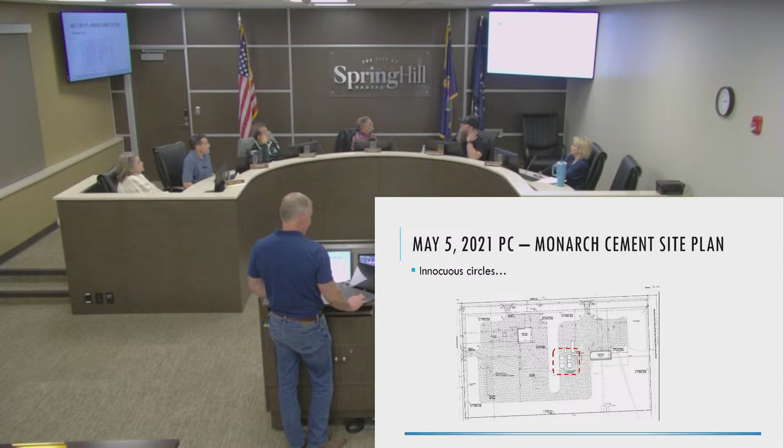So 2 years ago tomorrow night, the Planning Commission got this site plan for Monarch Cement, and you just see 4 innocent little circles there. How could you have possibly known? And then these are the elevations they provided, showing the buildings on site. But when you see it today, you have to think, well, who cares about those buildings? It's the elevation of those silos that really is the most impactful thing in that entire development.

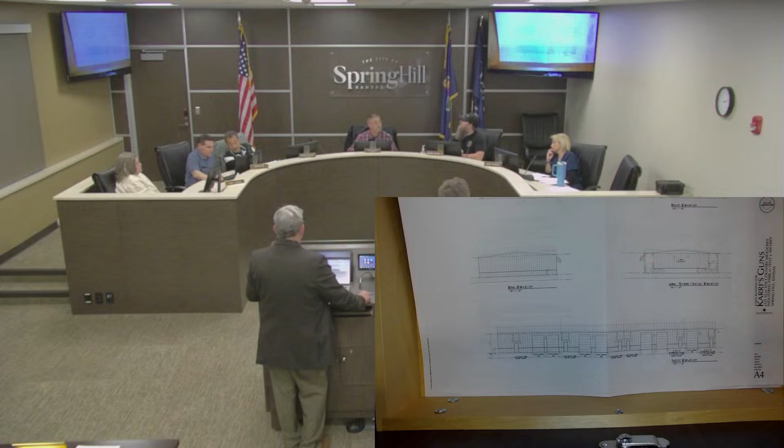Yeah, so the retaining wall is about midway of the building is when you would start seeing the wainscoting. Because from west to east, it starts about a foot and a half, 2 foot, and then climbs to the east to about 42, yeah about a 42, a 72 elevation there at the corner.

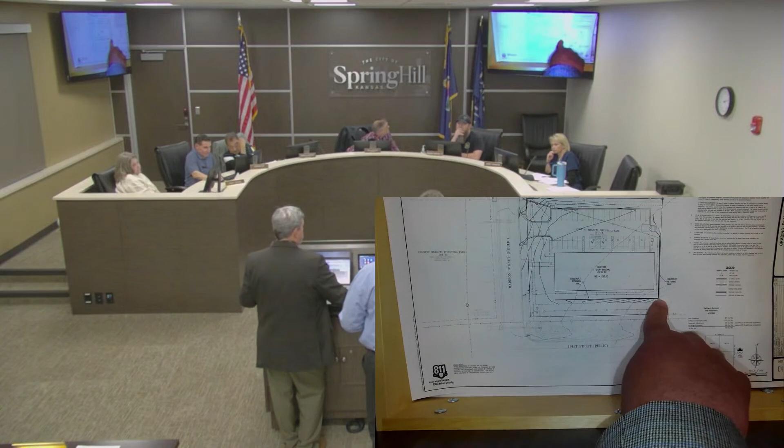So it's about 7 to 8 feet tall at that point. So you would end up with 0 to 7 foot. So midway in the building, you would start not seeing the 4 foot of wainscot. So essentially we're talking about half the building you'd be able to see it, and half the building you wouldn't be able to see it.

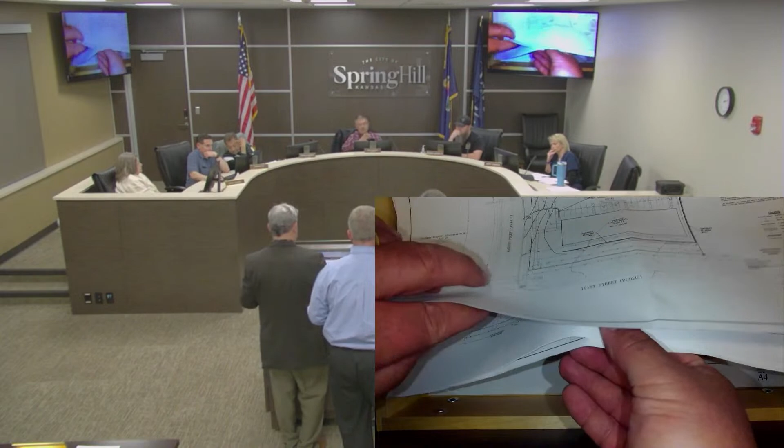Unless you're walking. That's correct. It's the landscape plan, I got showed that row of shrubs. Well, they got a lot of landscaping, but by the retaining wall it's immature for a while, that retaining wall, yeah, it takes a couple years.

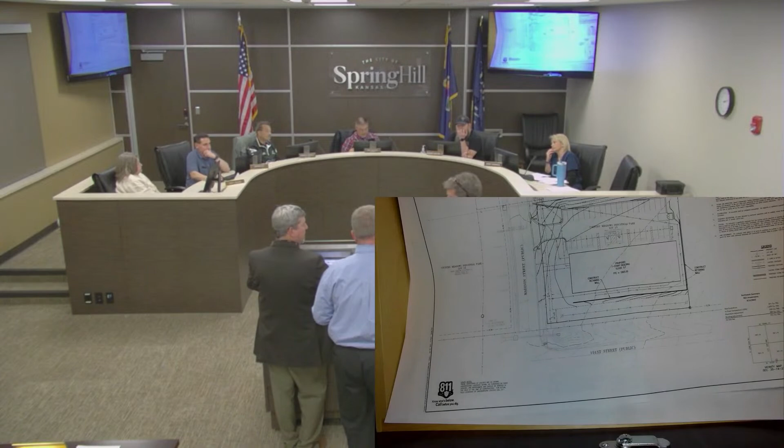Building side, so the high side of the wall is the road side. Right, yeah, no, I get that part. No, all we were gonna say was, and so how long is the building on that side of the? I think it's approximately, I got it right here.

180 feet long, give or take. So we're talking about 90 feet of the wall that you would see the retaining wall, and 90 feet you wouldn't see the retaining wall. Is that a fair assumption? Yeah, exactly, yes.

Assuming that, and I think what we're proposing then, if we need to show it on the south side, why wouldn't we start halfway, when you start to see that, when the height of the wainscoting matches the height of the wall, and then we'll go west with it.

So if we're going to enforce the 40%, is it 40% of that wall? It'll be 4 foot, we never really got the 40% through, we did get a 4 foot through. So we have a 4 foot, so it'd have to be 4 feet. So then we're talking about whether you do 4 feet for 90 feet of it, or not for 90 feet of it. That's what we're talking about, basically.

Or the applicant has proposed that, yes. So, I don't know, what do you guys think?

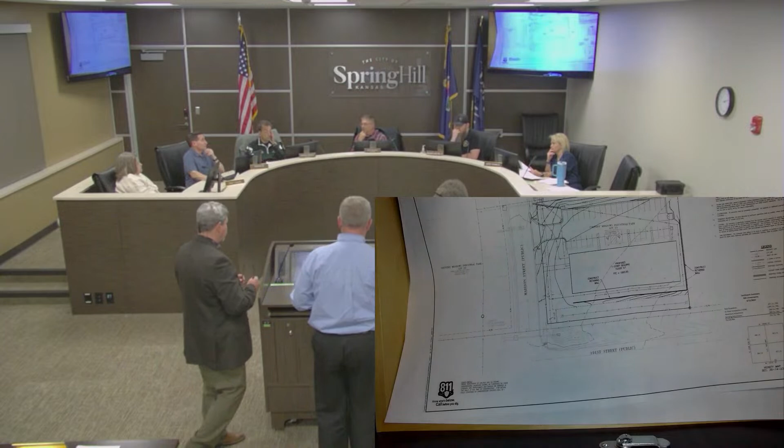I mean, I think that's reasonable, if you're not gonna see it, just to require the wainscot for that number of feet up to that point. Eventually the landscaping will come in too, by that retaining wall, I don't know if that's gonna hide it anymore, or how big those get, it's gonna take a few years. You're not really gonna see that part of the wall, it makes sense to me, you just do the wainscot for the west side, and then up to, what is it, how many feet is it?

It would be, what we would do is make sure right when the wainscot and the elevation of the wall are the same, that's where it would end. There's gonna be some adjustment on this wall in the field, so there always is anyway. It doesn't work out exactly like their plans? No.

So if that's what... go ahead, I'm sorry. No, I think I agree with Cindy with what she was saying earlier. As soon as we start modifying the code from what is required, then we open ourselves up for other people who want to modify it, whether it's landscaping or other things they build onto the property to change the way the building is supposed to look. And I think we open ourselves up for the opportunity for that to happen, and then we're sitting here going, well, we let them do it over here, so now we get to let them have it over here.

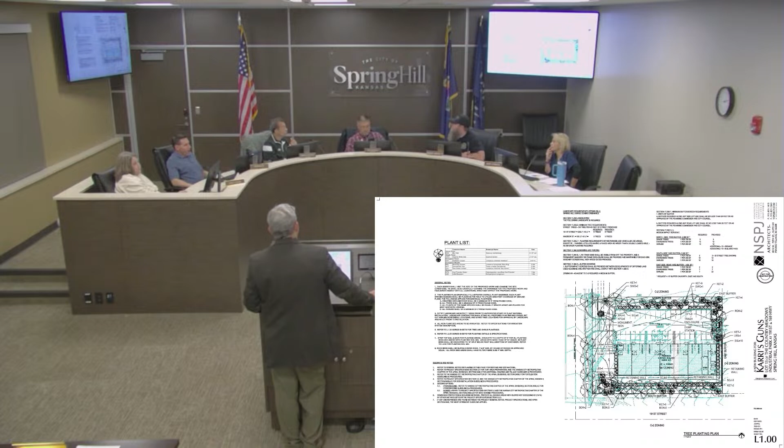You see on the west side, right, sorry, how it's a little bit with the elevations. You see how it's different, he went up the corners and things like that. So maybe he could come in with some sort of design, if he even wants to mess with it on the south side. Maybe the placement of a tree or bush there, something that didn't make it look like it was breaking off.

Right, so we can work with the applicants on that, and my guess is that when you're into this construction, it's gonna be just as easy to wainscot it out. But we'll definitely work with them on it and bring any changes back.

Good question, though. Trying to work with them, that's good. All right, thank you. Any other discussion that you guys wanna have on this?

Motion to recommend approval for site plan application SP 84/2023 for RCK Investments LLC with the addition of wainscot on the south side of the property per code.

Second. It's been moved and seconded. Start the voting on the left. Aye, aye, aye, aye, aye. Motion carries 6-0.

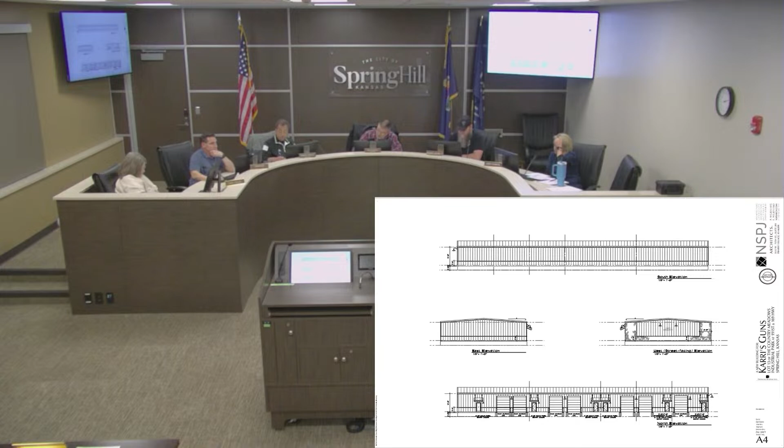Thank you all for coming. Moving on to agenda item 5, preliminary plat application 94-2023 for Avondale Meadows, formerly Gossel Farms.

Thank you. This is strictly administrative. There's absolutely no change except for the name.

That's all, that's it. So it looks like there's a little bit of change to the plan, or is that preliminary plat, there is no change. I'm just looking at the diagram on our sheet. Oh, well, I think what they did is they had to change a little bit of the detention basin area, but that's all. None of the streets changed or anything of that nature.

I'm looking, they have, it looks like there's new houses on here, new properties. Did I get a change? There's a curved road and then, I'm looking it over, that wasn't what was submitted on, or I wasn't submitted on this. There's a ton of changes in like here. Check the application.

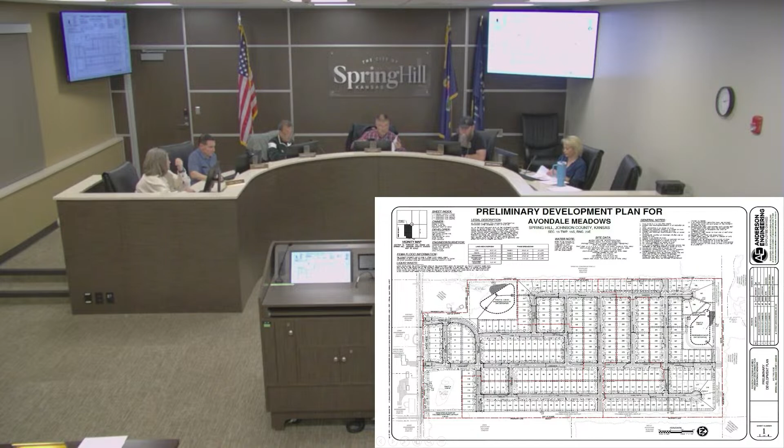Motion to table agenda item 6. Second, second. It's been moved and seconded. Start the voting on the left. Aye, aye, aye, aye, aye. Carries 6-0 also. Get all that straightened out.

Okay, moving on to item 7, final plat for 82-2023 Oak Woods Townhomes, second plat. Okay, thank you. So,

Oak Woods Townhomes, they've changed from the original plat on there, they changed it a little bit and added, if you remember we brought the preliminary plat to you, they've reconfigured the lots and all on this, and what they're doing is platting each one now in accordance with the original plat. It's 49 buildings, 196 doors on 17 acres.

And here it is. So as you can see now, they have the lots actually platted out. When it originally came out, it was one big lot area, as you can see on page 2, your top. And it's now platted out as lots. It does conform to the original development plan after it was modified a little bit.

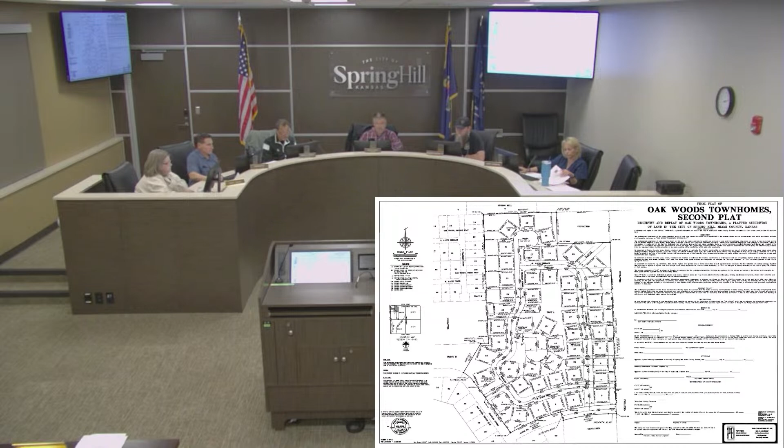I move we recommend approval of plat 82-2023 to the governing body for Oak Woods Townhomes. Second. It's been moved and seconded for Oak Woods Townhomes, plat 82-2023 for approval. Start the voting on the left. Aye, aye, aye, aye, aye. Motion carries 6-0.

Okay, public hearing, rezoning application PZD 85-2023 from RP4 to RP4 amended. So on a public hearing, I will open the public hearing and then we'll describe any ex parte contacts that any of us might have and any conflicts of interest that we also might have. So I guess that's the first thing we'll do. And is there any context or conflicts of interest that anybody needs to discuss?

Okay, then we have the staff report regarding this case. So, Mr. Burton, we're ready.

Thank you. Oh, I have no idea. It seems like... no, I have it up. I just have to get to it. My computer does not like me today.

Yeah, this is it here though, the old one. We have to have the old one up there too. So I wanted to show them the old one. So what we have is, we all know it as Prebes Development there. And up on there right now, you can take mine off for a minute, and as soon as the computer slims down a little bit, I'll redo it.

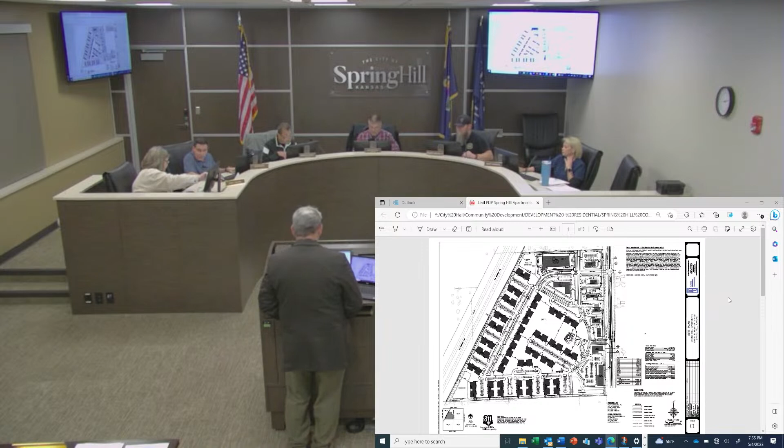Go closer, they're all the ones on the... go down over there. Yeah, it's all here. No, go look over here, how many units are these. Yeah, you zoom in, you can see it's this 4-story, right? That's part of the original though, isn't it? I was gonna say, I only... this, come here, there's 4. This is... you have... there's both.

So it's 4-story, sorry, 4-story, these are all, and then 3, four, 4, 3, 4 stories. It actually says it on the plan here. See these other ones? Yeah, I know, I didn't see it either.

No, I think that's fine. You said the number of doors, Pat, only went up what, 30? Something went up, 33? 33. It went from 732 to 765.

I personally think it's better, and it's fine, and it's nice to have the commercial in there just to see a general idea of what it looks like on the side, even though this is just before. No, yeah, and that is correct though, it gives you a feel for the entire site.

I'm anxious to see if they've got people for those. Oh, I would imagine that right off the bat they're not all full, but that's a lot of commercial for this community to handle.

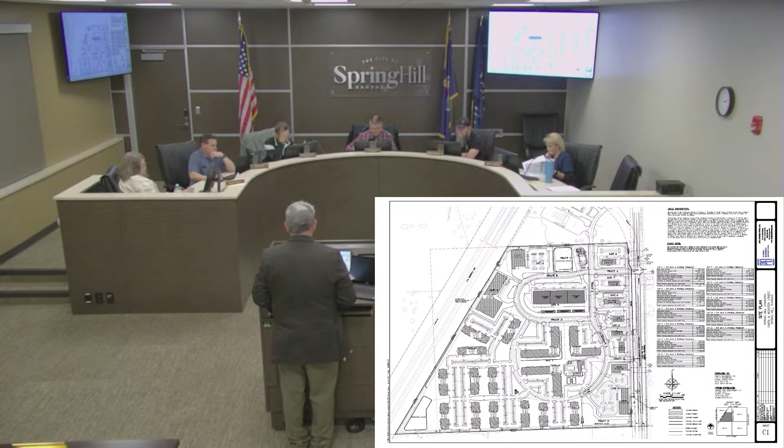So now we move to the preliminary plat. A plan district has its preliminary plat, final, and all combined. The next thing we look at is an overall preliminary plat of it, due to there being straight zoning areas included in this entire plan. So although the PZD or the planned district is incorporated on this, we're looking at really the commercial and industrial type zonings on this. So it is still 64 acres, and we've been through the elevations and things of that nature on the apartments and all, or the multifamily portion of it.

We've covered a lot of what's already changed as far as the different tracts and lots, and what the proposed uses are in those areas. If there's any questions—we'll mix the commercial and the industrial together on this. But we have a detention basin.

One good thing that did come out of all this is that the pump lift station was eliminated. We're trying to reduce all these lift stations we can, and they're actually able to gravity down there to the lift station that was at a QuikTrip. By moving everything around a little bit, I believe it did help on that as well.

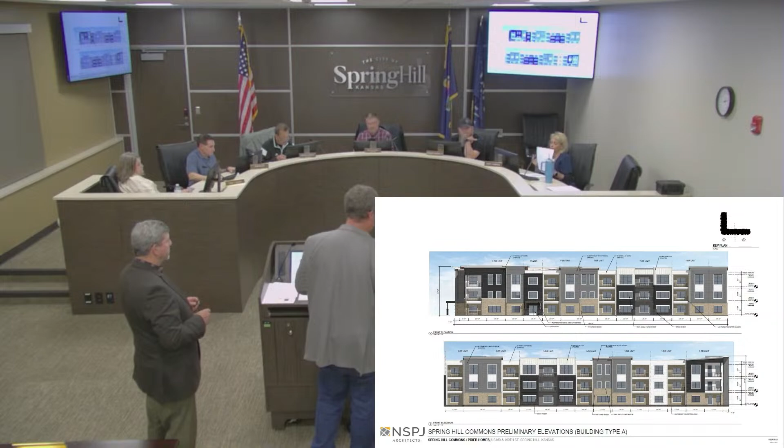Judd Clausen again with Phelps Engineering. So the center L buildings there, those are the 3 stories. You can see, like say that northwest L building, how the parking lot kind of comes up to the building—those have the tuck unders on that parking lot side. Then between the 2 L buildings is all green space in kind of a plaza courtyard area, so there's no road there. But then like on that southwest L building, you can see the same thing—you have on the parking lot side access to those tuck under garages on that side of the building, so on the inside of the L's basically.

And on the other buildings, say you're way over in the southwest corner there, you can see there's a parking lot that the buildings kind of frame around, and so on that side you've got the tuck unders on those buildings as well. Then on the opposite side you've got like a courtyard green space again that people's patios and decks and stuff face.

So essentially on the one side you'll have garages and then on the other side you'll have apartments? It'd be green space, yeah, or another building across the way. So what you don't see on here yet is all the sidewalks—you saw a preliminary landscape plan, but there's a lot of programming that goes into there. There might be grill patios or benches and all kinds of stuff that goes on in there, or just open space too for people to enjoy.

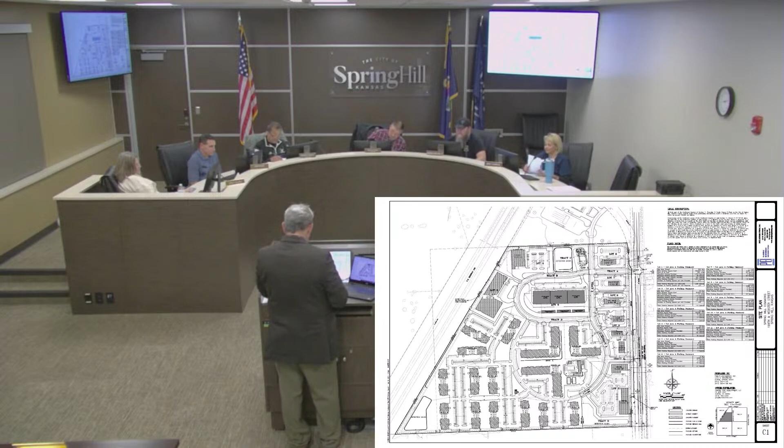Okay, public hearing. We're back to put another public hearing here, so let me get my instructions out. We'll open the public hearing. Is there any ex-parte communications and or conflicts of interest that anyone needs to reveal? No. Okay, ready for your report then? Sorry, you gotta be ready. We're moving along. Yeah, that's great, thank you.

So this is the 18.77 acres, proposed C2 zoning. The current zoning, as Judd had indicated, they've adjusted the lines, but within that current zoning there's C2, industrial, as well as RP4. So looking at this, the light blue area will go to straight C2 zoning. Most of it was already the proposed area for the C2 anyway, and the neighborhood and surrounding districts, we think it will definitely help support the multifamily as well as other businesses - the multifamily the other way and the other business the other way, as Judd had explained earlier. So really, if there's any discussion at all, staff supports this to be changed as presented by staff.

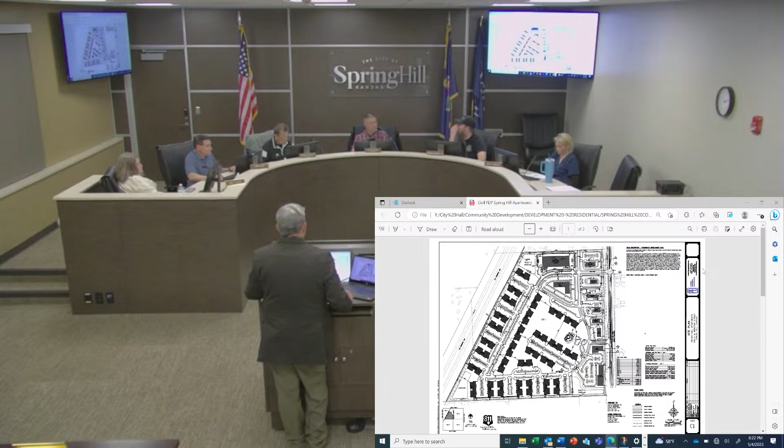As I'd spoken before, they originally planned the area shown in pink, right along the highway, for discussions with the city about a justice center, but those discussions fell through. So they went back to the drawing board and came up with a really good plan, as Mr. Clausen had spoken about, for a wood shop or office warehouse, something of that nature.

Other than that, there's not much else. Staff supports it.

Give you one more chance to put your 2 cents in. Again, I'm here for questions, thanks.

Any additional clarification needed for anybody on the board? Any public comments? Okay, we'll go ahead and close the public hearing. It starts the 14-day protest period.

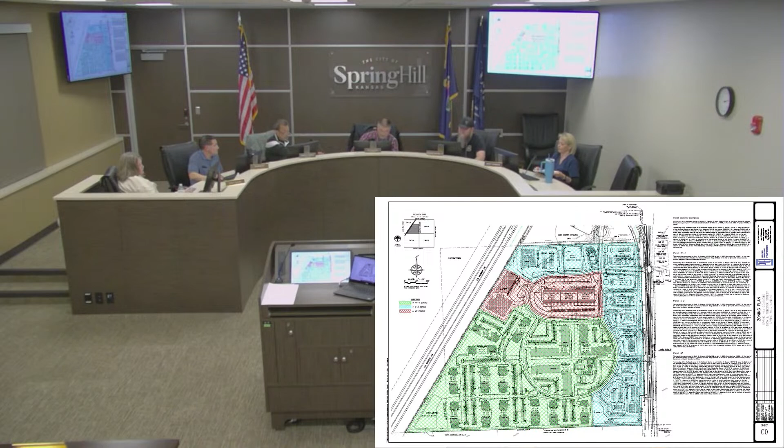Any other deliberations and or motions? Move that we recommend approval of Z 87-2023 to the governing body as presented by staff. Second. It's been moved, seconded, and thirded. Voting on the left this time. Motion carries 6-0.

Thank you all. Moving on to status update for the discussion of the comprehensive plan. Oh, we have one more. I'm sorry, item 12 now. Sure, thank you, I got distracted. Yep, we can do it, it's easy.

You ready? Okay, so this was turned in by Concrete Materials, Inc. It sits on a piece of property owned by the Crawford family and Dunmire Family Trust. They do have permission from the property owner, if passed, to utilize that property for this. It was never proposed in the original site plan, and what we always ask is about any type of signage, on-site or off-site. The reason we bring it to Planning Commission is that it falls under the sign regulations, which call for a maximum of 4x8. They're asking for double that.